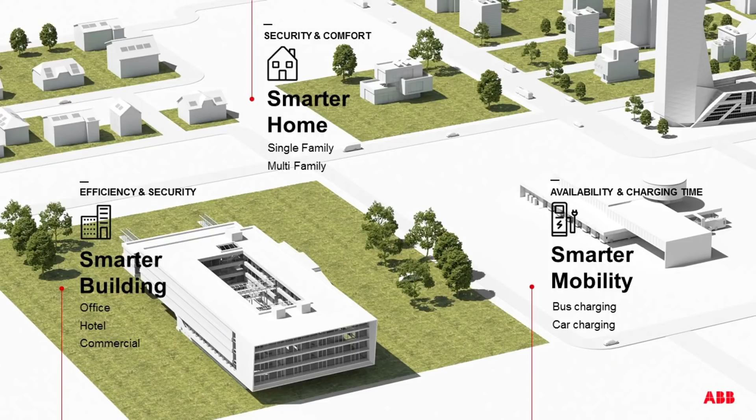Within ABB, we're taking a very holistic view on smarter homes when it comes to single and multifamily buildings, on smarter buildings when it comes to offices, hotels, and infrastructure projects, and last but not least, on mobility, where we're looking at car and bus charging solutions that can be combined with homes and buildings in the future.

So let me take you through some of the current possibilities with smart homes - things that are basically available today in a smarter home, before I talk later about future possibilities.

Two of the most important drivers today for smarter homes are comfort and security. With comfort, you'd usually have the possibility to switch your lights, switch your blinds, and have some kind of heating attached to the smart home system. On the security side, cheaper cameras help increase the sense of security in the home, and door entry systems provide access control of who is entering and at what time. These opportunities are already present in many houses today.

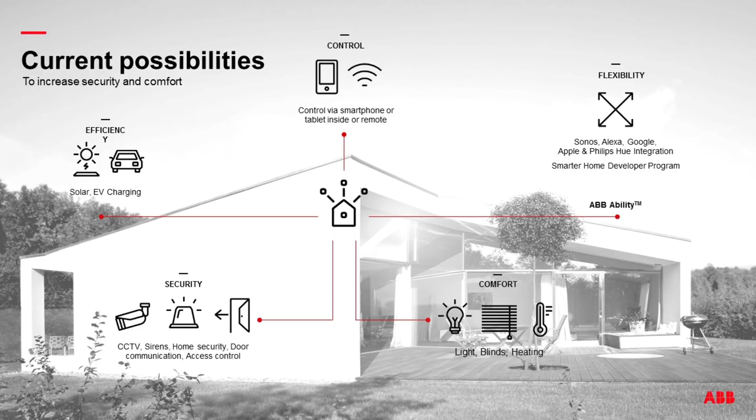In addition, energy efficiency already plays a role in homes today, but probably increasingly so in the future. The opportunity to control your devices remotely is becoming more important. And last but not least, we've seen many consumer goods - Alexa and Amazon, Apple, Philips Hue, just to name a few - being integrated into homes, and integrated with the home automation available in those smarter homes.

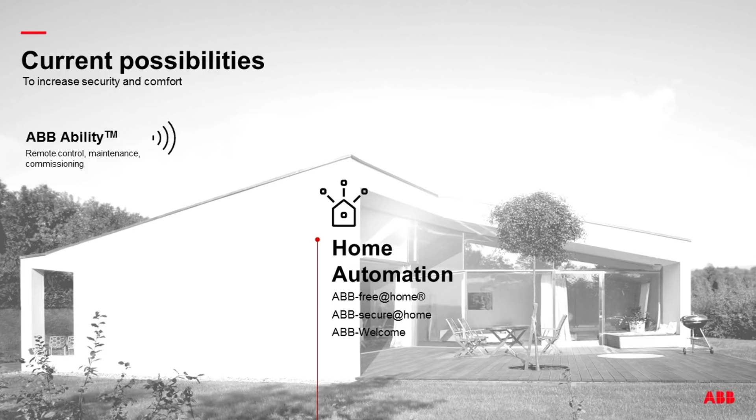I think it's important, to get the maximum benefit out of all this, that you apply home automation systems combining many of these use cases into one holistic system that can be IP-based and built on certain standards, like some you see here on the slides. It's important to connect those devices and systems into one larger home automation system going forward.

Now let me move from smarter homes to smarter buildings, and talk about what is probably possible in many larger commercial buildings today already.

The biggest two use cases we see for smarter buildings today are energy efficiency and security. On the energy efficiency side, HVAC control and load management is a big use case for especially larger commercial buildings today. But with the cost of communication coming down, our expectation is that it won't only be large commercial buildings in the future that implement those systems, but mid-sized buildings as well.

Security plays an important role here too. This isn't just about the security to enter a building, it's also about the security to enter specific floors or specific offices in a building. Clearly there are huge opportunities. And last but not least, we'll see a convergence of building automation systems and emergency lighting systems that will be combined to provide further security in commercial buildings.

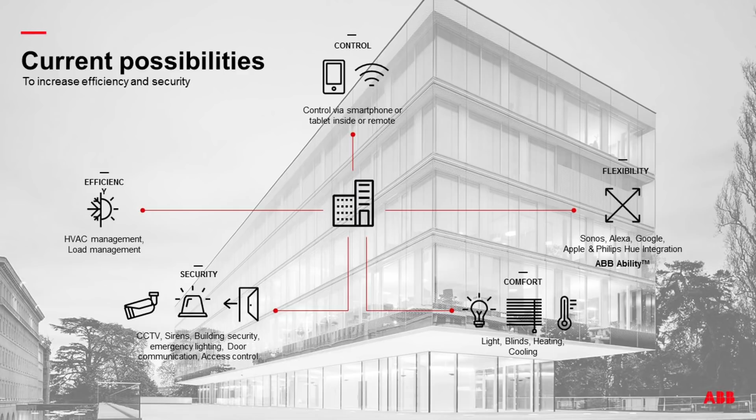Other relevant use cases in commercial buildings include comfort and lighting, such as navigating the blinds according to how the building is being used at certain times of the day.

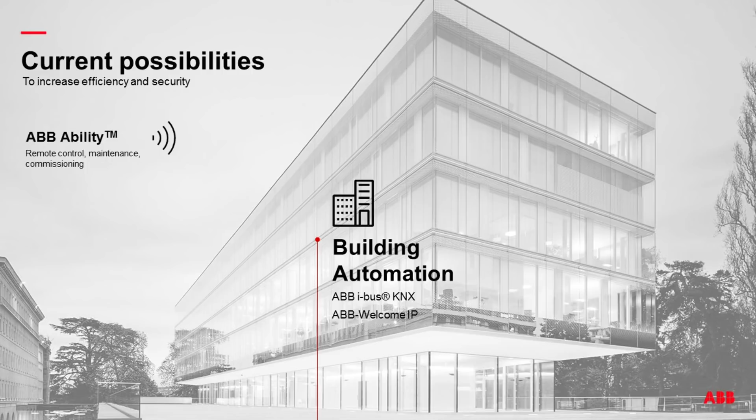Similar to what I said for the home, in a smarter commercial building it's important to have international standards applied to your systems, so you can put different parts, maybe even from different providers, into one holistic solution. At ABB, we rely very much on either KNX-based solutions or IP-based solutions going forward.

So now let's move from the current possibilities to what we think is possible in the future.

Specific smarter home solutions look at predictability of the usage of the house. For example, the weather forecast will tell you a lot about what the temperature in the house needs to look like over the coming days and how that can be adjusted. The usage pattern of people in the home - when they come, when they leave for work, when they go to school - will again have a big impact on how the home can be configured going forward.

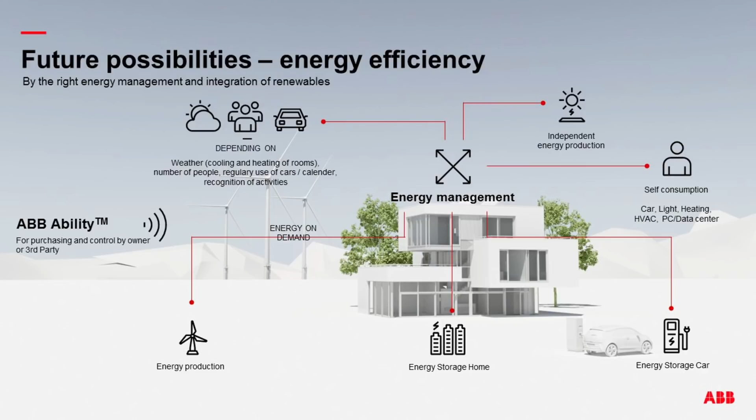And last but not least, with the uptake of electric vehicles, it will be important to have the management of that electric vehicle seamlessly integrated into the overall energy management system of the house. This is a big opportunity to utilize self-consumption as much as possible of the electricity that gets generated and stored within the building.

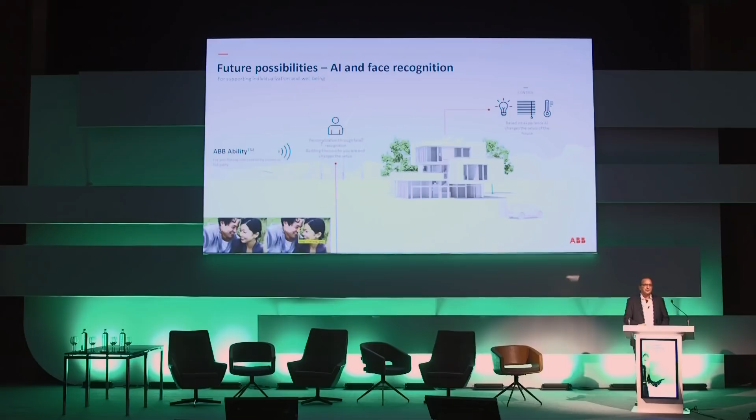But there are also further opportunities here when we look at smarter homes. From our perspective, artificial intelligence and face recognition will become major use cases for smarter homes in the future. Might not be today, might not be tomorrow, but certainly we see a big opportunity here.

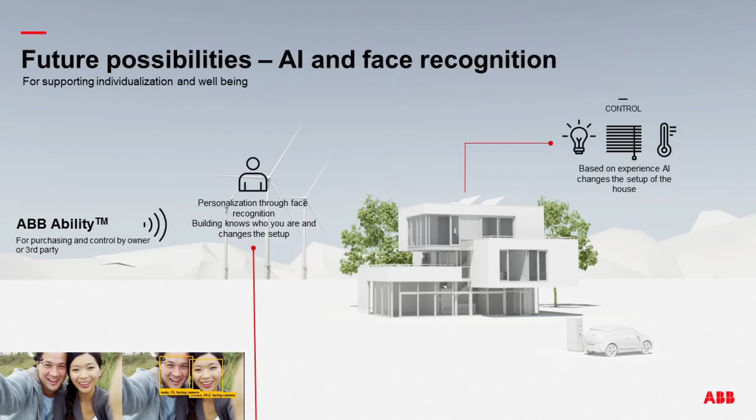What is the opportunity? With artificial intelligence combined with face recognition, the personalization of a house becomes really relevant - understanding the home, understanding who is entering at what time, what are the certain habits, what things the person living there would like in terms of lighting, heating, maybe music - all very tailor-made.

There are multiple use cases all the way up to elderly care that could be driven by face recognition combined with artificial intelligence, making sure your building not only reacts to the preferences of the people who live and work in it, but also learns as a building going forward, in order to have settings available that suit all family members best in the future.

So now let's take a look at what that actually means for commercial buildings.

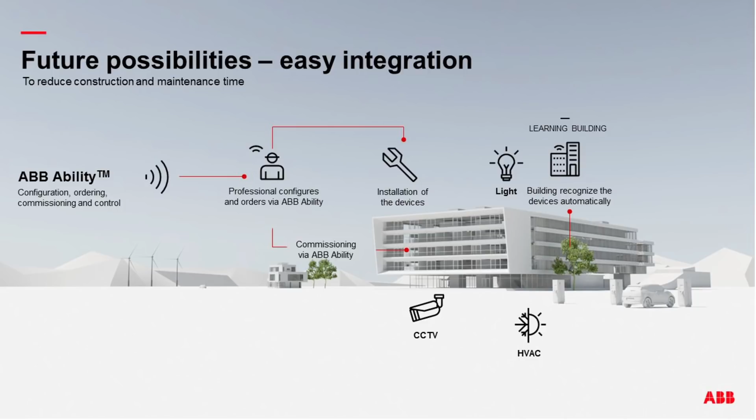You see here on the picture that a professional planner or system integrator will configure, hopefully online, a complete building automation system for a commercial building. That equipment will be sent to the site where professional installers will then install the equipment, again via a cloud-based system.

You would be able to commission all the devices in the house, and once they're commissioned, those devices will actually start talking to each other, identifying each other, and the building becomes a smart building - a lot easier compared to what today in many of the more sophisticated buildings needs to be done in order to move a building from a non-smart building to a smart building in the future.

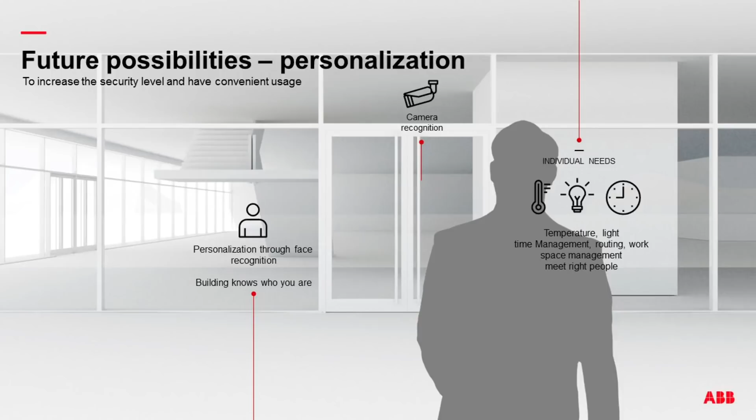So now let's look at what personalization actually means for the smarter building. I already had some examples before on the smarter home, but I think it becomes really super exciting when you talk about the smarter buildings of the future.

Face recognition is already something you have on your phone today, right? You can access your phone with face recognition, but the opportunities for smarter buildings are tremendous. A person enters the building, gets greeted with their personal name because the camera has already detected who it is. The building knows that person is entering, what kind of meetings they'll have that day, which floor they work on, and also their preferences with respect to light and heating. All important information that personalization will make possible in the future.

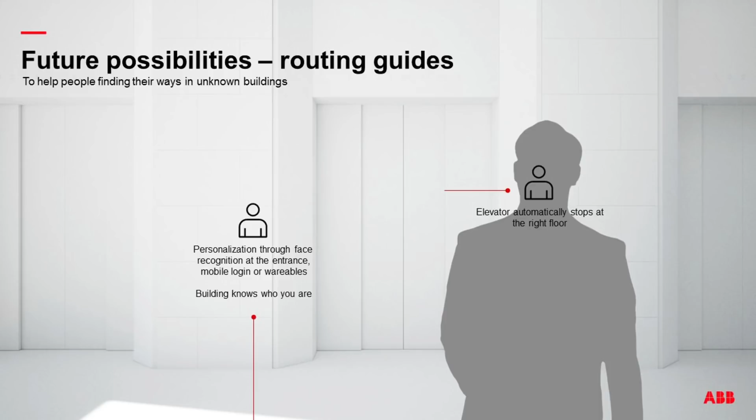Move on into the building, walking to the elevator. There are sophisticated elevator solutions available today already, and they're becoming more and more sophisticated. But ultimately, not even having to choose the floor to where you need to go, the elevator already knows which floor you will be going to that day - an additional advantage.

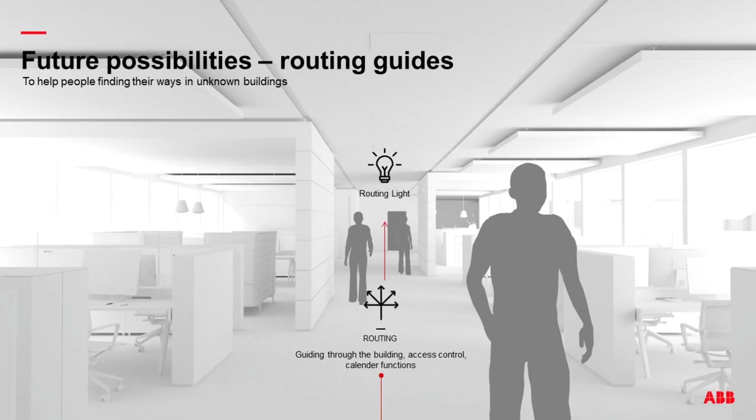Coming into the office environment, here you see the person walking in. There will be routing lights navigating the person directly to the office or to the meeting room where the next meeting will take place, and again the opportunity is there to support that with the help of smarter technologies.

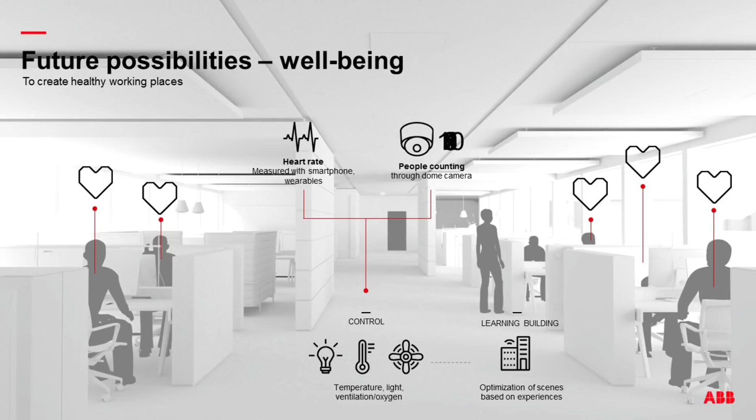Now let's take a look at well-being. There are many statistics available showing that the productivity of employees in an office environment can be dramatically improved by making sure that the environment with respect to lighting, blinds, sunlight coming from outside, temperature, oxygen, etc., will have a big impact on the productivity of the workers.

So, together with a building automation system, combined potentially also with wearables that people have, where the heart rate gets measured, you can realize when people are getting more tired in the afternoon - maybe the oxygen needs to go up, or it needs to be a little cooler in the room. All of these things are possible in the future when looking at well-being in the building.

Having said that, there will be a learning process. The interesting part is that if you run through a cycle in the building for a couple of weeks and months, you clearly get a pattern of how that building is being used. In a learning building, coming back to my point about artificial intelligence, that learning will help to further improve the processes in that building going forward.

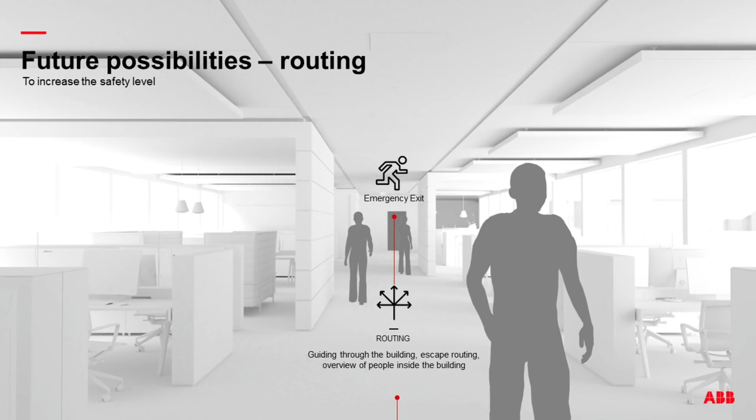Last but not least, in case of an emergency - I think that's a really important and nice feature coming in the future - emergency lighting systems and emergency control systems can be easily combined with a building automation system. Clearly, when there is a hazard in the building and you have five exits to choose from, it would be nice to know which one is the best exit based on the hazard that is present in that building.

And with more sophisticated solutions, this will be possible in the future.

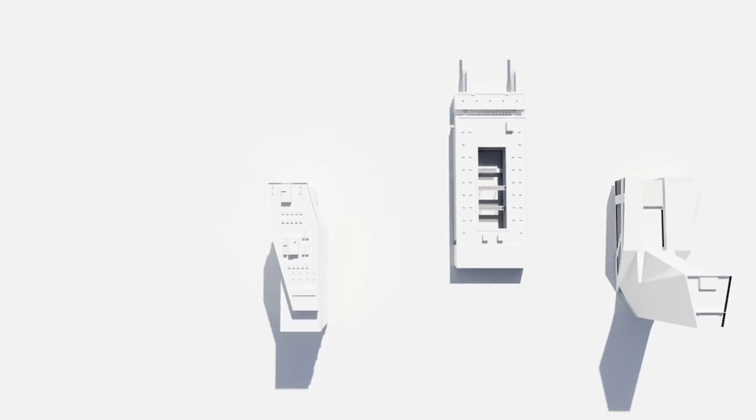So now let's move away from how the building is being used internally, and let's look at the possibility for maintenance in the future. I think you all know, and it's been used for decades in the factory environment, predictive maintenance is really important. But with communication costs coming down for sensors, it will be possible to have sensors equipped to the critical equipment in a smart commercial building.

What will that do? First of all, it's known that predictive maintenance is about 3 to 9 times cheaper than reactive maintenance. So having the information ahead, knowing when critical infrastructure in the building might fail, is a big advantage, because people can react to it much earlier.

Also, the maintenance department does not necessarily need to sit in the same building, and can just get navigated to the building whenever there is a failure detected by one of the sensors. So the technologies that will come here are really helping to maintain and sustain the building in the longer term. And with artificial intelligence combined, there will be learning, because once these technologies are rolled out, the learning part of the building will help further improve the design of buildings in the future.

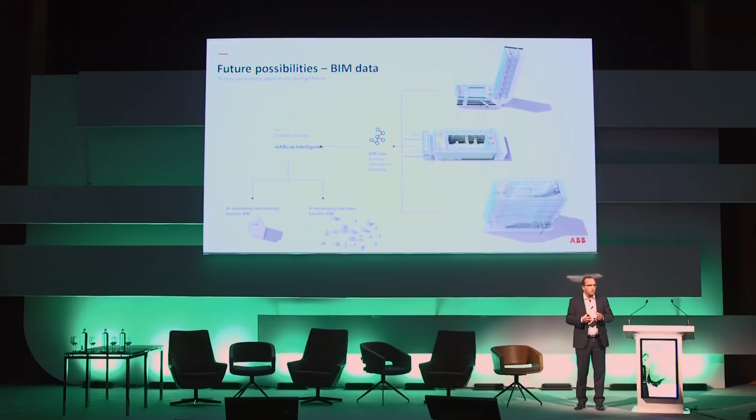Just imagine you have all the data of the building today available, but also the data of buildings constructed in the past that have had those features I've mentioned in the last couple of slides. That means those learning curves, those learning cycles in terms of how buildings are actually being used and the best possible ways of improving productivity and well-being, can be used in the design of new buildings, and also in the design of new cities.

That's why, coming back to the beginning of my presentation, it's important to look at a holistic ecosystem of homes, smarter buildings, mobility, and ultimately smarter cities, because there's a lot of opportunity these technologies will offer us in the future to optimize those. With that, I would like to come to my conclusion.

I've talked a bit about the megatrends impacting the industry going forward. Urbanization, digitalization, and also the changes to flexible demand and flexible supply play a major role and will have a major impact on how buildings, homes, and mobility will be generated in the future.

The expectations are pretty much the same, though they have a different emphasis. More energy efficiency, maybe on a smart building, more productivity in a smarter building, probably a little more comfort at home. But control, security, flexibility, efficiency, and comfort are important drivers, important use cases relevant to the home as well as to the building.